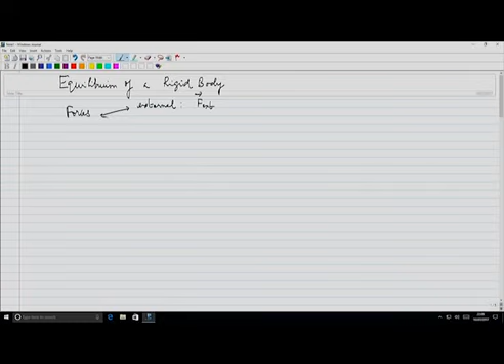Hereafter mostly our focus is going to be on rigid bodies. We had seen that the forces acting on rigid bodies can be divided into two groups: one, external forces, which we generally call force EXT, and internal forces, which we denote as force internal. We had seen that these internal forces usually do not contribute, either for rotation or for translation.

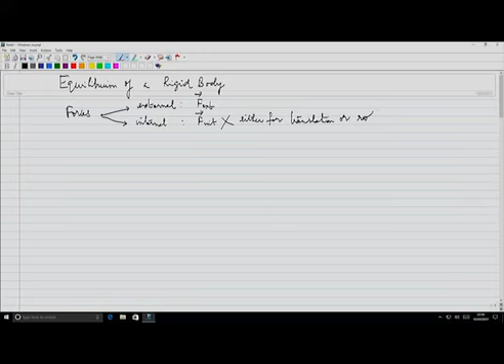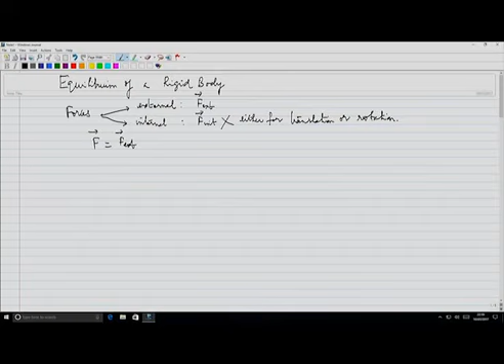So unless otherwise specified, most of the forces we are going to consider are external forces, so we will simply denote it by F vector. Now remember, we have dP by dt, rate of change of momentum, equal to force, and the rate of change of angular momentum is what we call torque, which is responsible for the rotational motion of the object. So whenever a body is subjected to force, there is going to be momentum or acceleration—translational motion is possible—and due to torque you will have rotational motion.

Now we have the concept of under what conditions the system is in mechanical equilibrium. There are different kinds of equilibria a body may be under. There is something else called thermodynamic equilibrium, chemical equilibrium, but right now we are concerned about the concept of mechanical equilibrium. So what is this concept?

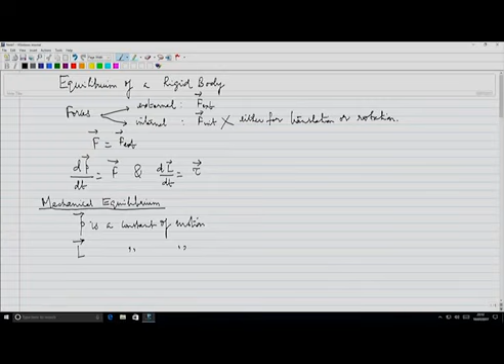This is like this: if linear momentum is a constant of motion, that means linear momentum is conserved, it is not changing. Then in that case what happens? On the other hand, if the angular momentum is a constant of motion, then what can we have? So what happens in this case?

This implies the sum of all the forces acting on the body—there may be several forces, force is a vector, so sigma over i, 1 to n say—this becomes 0. So for mechanical equilibrium, the system of all forces acting on the body must be equal to 0. This is what you call the translational equilibrium.

Then next, if tau is 0—if L is a constant of motion, this implies the various torques acting on the system, depending on how many of them, this is equal to 0. This is what you call rotational equilibrium.

So what is the meaning of the first equation? Remember it's a vector equation, therefore the sum of all the x components of all the forces is equal to 0. So if Fi is the ith force, the x component, and I am summing over all the forces, this is equal to 0. Similarly, all the y components is equal to 0, and all the z components is equal to 0.

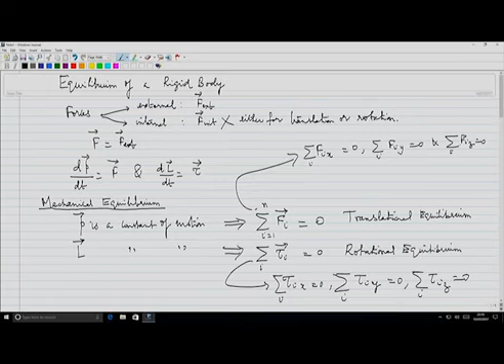Now what this means is that torque is a vector. Again, the sum of all the x components of the torques over all the torques acting is 0, the sum of all the y components of torques is equal to 0, and the sum of all the z components of torques. Here I am writing these two equations in component notation, therefore there is no need to write vectors, we shouldn't write them.

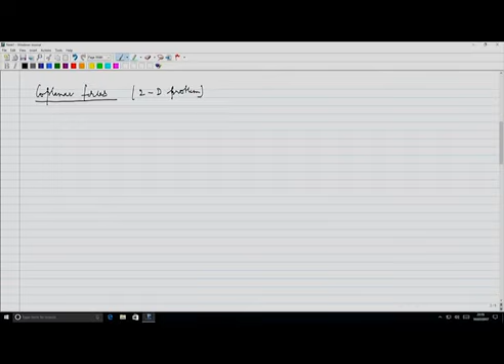Suppose we have coplanar forces—a special situation, coplanar—and let us say the system is under equilibrium. It is essentially like a two-dimensional problem, meaning all the forces are acting on, let us say, the XY plane. Then what happens? For the translational equilibrium, sum of Fi is equal to 0.

This means two conditions: the sum of the x components is equal to 0, and the sum of the y components of the forces is equal to 0. So this is essentially two conditions. And you need to look for a direction perpendicular to this 2D plane—there is no rotational motion about that axis, therefore tau about that axis perpendicular to F1 and F2 vanishes. So essentially it is only three conditions.

Now let us consider an important case. Suppose the sum of all torques acting on this body vanish. Now you may say that I am going to calculate these torques with respect to some other origin. Is it possible that the body will have rotational motion? The answer is no, and we will see why.

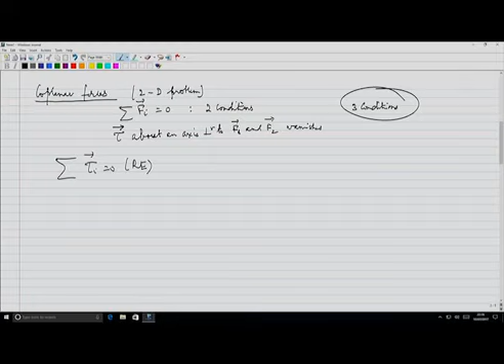I will consider sum of tau I equal to 0. This is for rotational equilibrium, I will call it RE. Is it going to remain valid? Does it remain valid if the origin is changed?

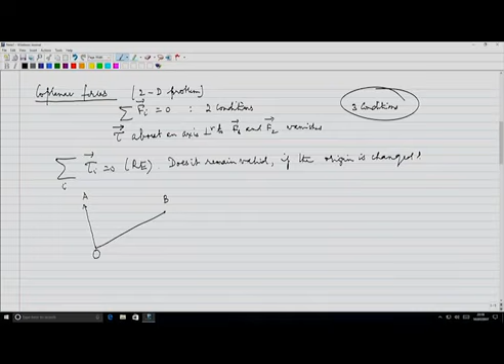You will see that it is a very easy, simple calculation. I have the origin here, and one of the forces acting at A, B, the two points here. Remember, it's a couple acting: minus F, and on this it will be F. These two have to be parallel lines, but in opposite directions. This is B, I will join this.

This is position vector R1. This OA vector has position vector R1. Similarly, OB vector has position vector R2. So these two forces, F and minus F, constitute a couple on a rigid body.

So now let us calculate the moment of the couple. What is the moment of the couple? This is R1 crossed with the force, crossed with minus F, then plus this R2 crossed with F. Actually, the force here is minus F, therefore I should not write it that way, simply write minus F, then F, right?

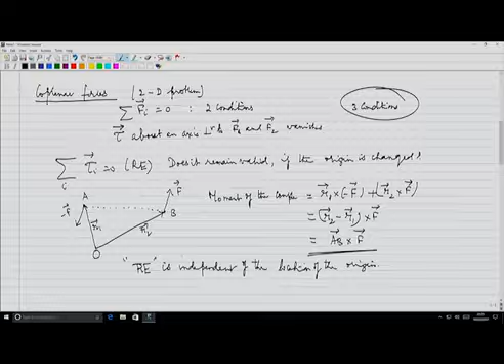So we can say that rotational equilibrium is independent of the location of the origin. And rotational equilibrium, RE, remember what it is, is independent of the location of the origin. So if a body is under rotational equilibrium with respect to a particular coordinate system, and then you change the origin and look at it, it will still remain the same. That is the message.

Now we will consider various cases as possible. The first case is like this - you can treat it as an illustration explaining the basic concepts. I consider a rod AB, with A and B here, and the center here at C. This distance is little a on each side. This is a uniform rod.

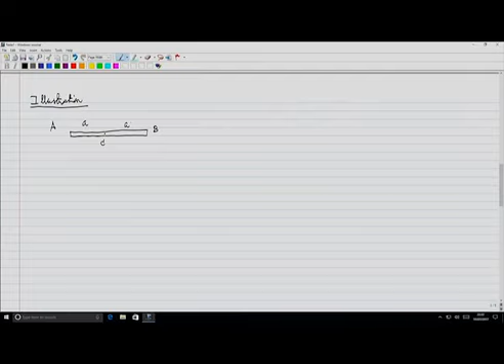Of uniform cross section. Now there is a force F acting, and then there is another F acting here. So this rod is subjected to two forces, F here, F here. This force will induce a torque in this direction, anti-clockwise, and this is clockwise. Both of them cancel, therefore tau is equal to 0.

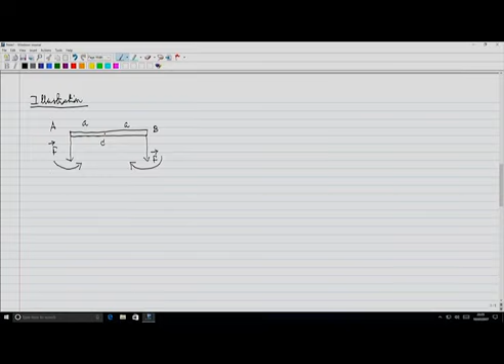But tau equal to 0 means it is under rotational equilibrium. So it is under rotational equilibrium. And what about sigma of forces? Total force is equal to F total, is not equal to 0. In fact, it is equal to 2F.

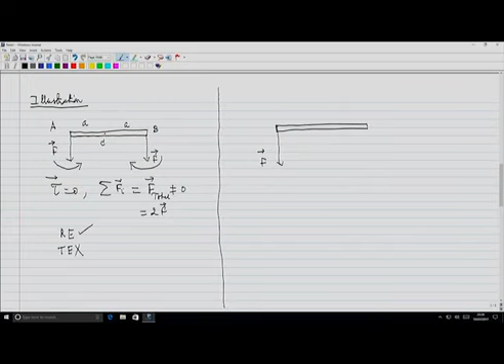So obviously, what will happen? This is a case where - is it under rotational equilibrium? Yes. What about translational equilibrium? No, it is not under translational equilibrium. Now we will consider the other case. We will consider the same rod, and at this end I have a force acting like this, and another force acting like this - it's a couple, strictly speaking, that's the definition. I have the center here. Now, the only thing I changed is I reversed the direction of one of the forces. In this case, what will happen?

Sigma Fi is equal to F total is equal to 0. They are in opposite direction, therefore it vanishes.

However, the sum of torques is equal to torque total. What is the total torque acting on it? With respect to this, it will have a torque in this direction. It is in the anti-clockwise direction, two times the torque due to each force. So this is not equal to 0.

Therefore, what about translational equilibrium of the system? It is under translational equilibrium. Whereas, what about the rotational equilibrium of the system? No, this will rotate. So such a situation, where the body does not have translational motion, where it is under translational equilibrium, however it rotates about a particular point and axis, this is what is called pure rotation.

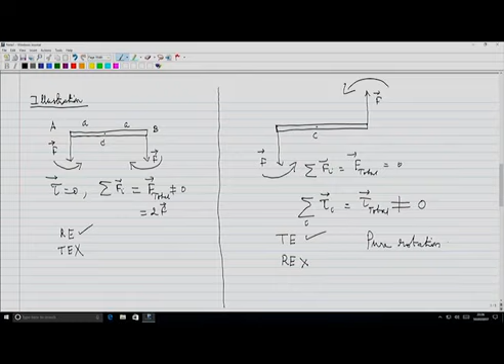We will see one special case. This is what is called a lever problem, a common lever which we use. This is what is called the principle of moments. Actually, this is taught even at an early stage in school. However, we shall discuss this from the point of view of translational equilibrium and rotational equilibrium.

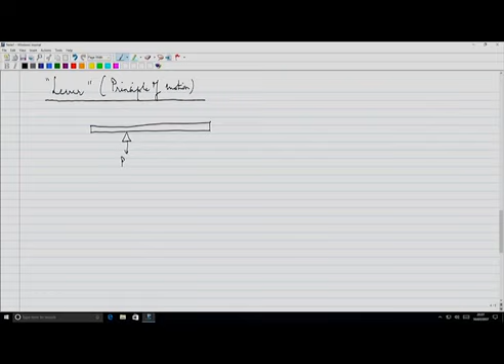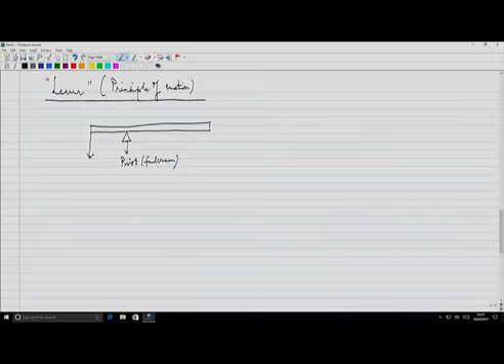So I have a simple lever like this. What you have is a fulcrum, this is what you call a pivot or fulcrum as it is known, and this is subjected to, here there is a force. This distance is d1, and then this distance is d2. Call this point as A, call this point as B.

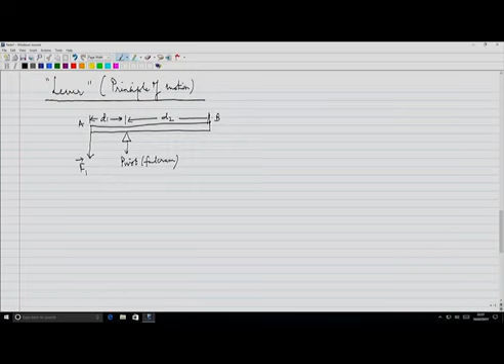Now this pivot point you can call it as O, about this particular point. Now what happens? This whole rod, ideally speaking, a lever should not have any mass, so it's of negligible mass. So an ideal lever has negligible mass.

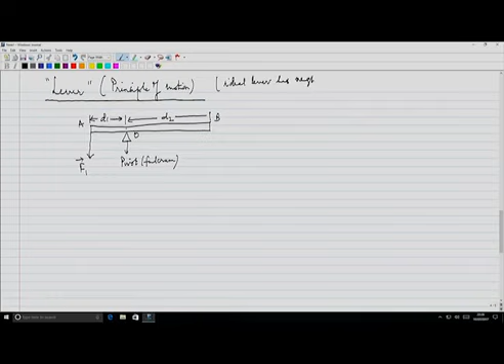So there are two forces, one force is acting here, another force F2. It will have a moment like this, it will induce a moment, this will induce a moment like this. Finally it will be there. So generally, this is the load arm, this section is known as load arm. This A to O is known as load arm, then O to B is known as the effort arm.

There is a weight here which requires to be lifted or moved, and here is effort, some force you are going to apply. Now there are forces acting here, therefore there will be a reaction at this particular point, reaction at the fulcrum. Reaction of the support at the fulcrum, this is a vector quantity.

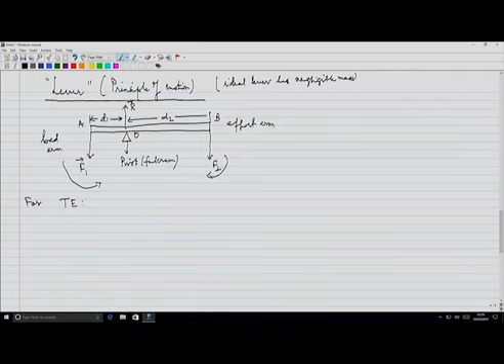So for translational equilibrium, what we need is this R must be equal to F1 plus F2.

Now, taking moments, there are three forces acting essentially: F1, F2 and the reaction, which is also of a force variety. Now taking moments about this particular point O, what do you get? The moment due to F1 is F1 into D1. And because this is rotational equilibrium, you will see that this must be equal to F2 into D2.

So this is for rotational equilibrium, you have this condition; for translational equilibrium, you have this other condition. From this, the object is not rotating at all, it is in equilibrium, neither rotating this way nor that way. Both these moments are cancelling each other. So from this we have F1 by F2 is equal to D2 by D1.

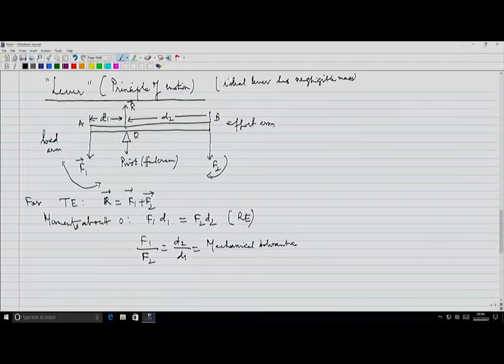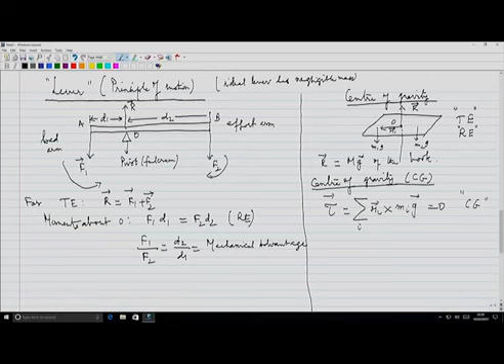So what happens is, the center of gravity of a body is that point where the total gravitational torque on the body is 0. This is the definition of center of gravity. The total gravitational torque acting on the body must be equal to 0, and so Ri and G are perpendicular to each other. Therefore essentially you are left with summation of Mi Ri equal to 0.

At this stage one would think that this is the same as the center of mass, but it is not. Remember, the center of mass definition is this quantity divided by the total mass. However, it will turn out to be the same if the origin is the center of mass of the body. If origin is the center of mass of the body, then it will turn out to be the same. So the center of mass and center of gravity, both of them...

...will turn out to be the same if the body is subjected to a uniform gravitational field. So center of mass equals center of gravity in a uniform gravitational field.

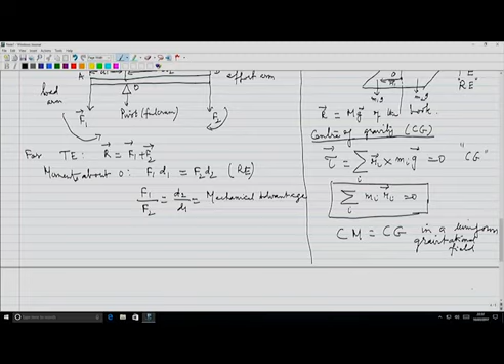Now, on the other hand, if G varies from point to point, then center of mass and center of gravity do not coincide.

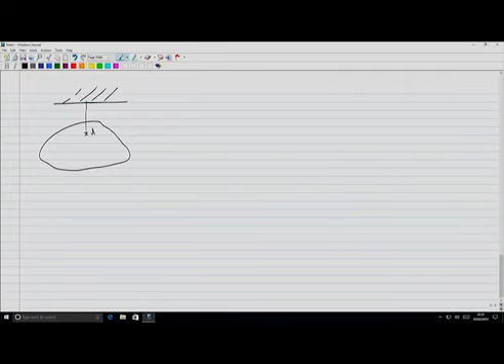Now how is the center of gravity of a body determined? This is again a very standard one. Suppose I have a cardboard or something and I want to find the center of gravity. This is a very standard procedure. What you do is you suspend it from a particular point A. This point is A. So the whole weight is going to act along this direction.

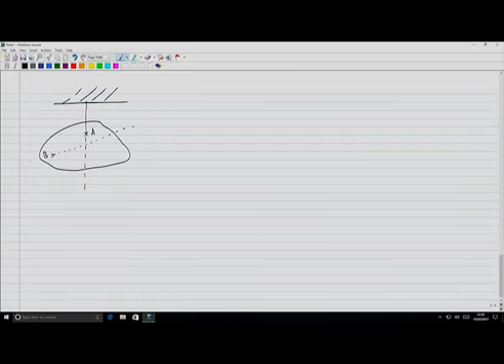Now you take some other point B and suspend it again. Then its weight will act along this, when you fix the whole body about point B. Similarly, you will find that various lines will intersect. Suppose I have another point C here and do this. So this intersection is the center of gravity. So this O is the CG of the body.

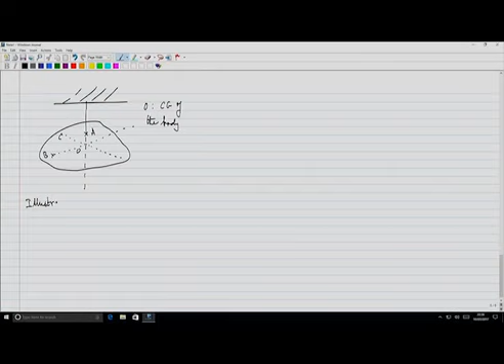We will work out an illustration, a simple problem to illustrate this. You can treat it as an example, with various concepts which are involved. We will put that together - so I have a rod.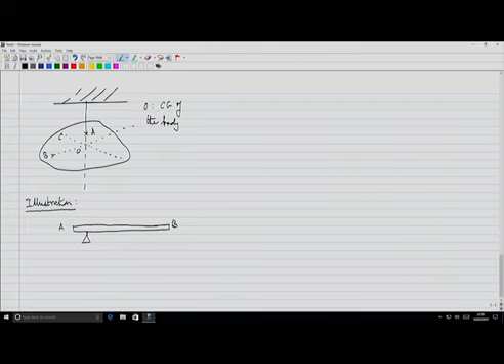This end I will call it as A, this end I will call it as B. There is a pivot here, K1, and there is a pivot here, K2. It's obvious that there will be a reaction here.

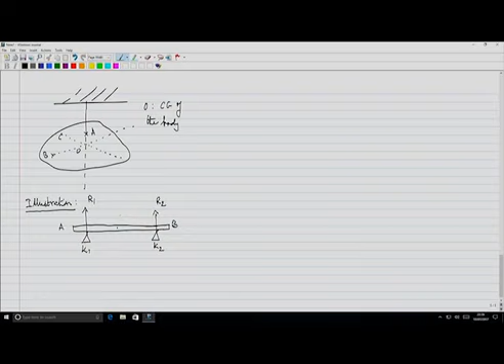The weight will act down. Let us say that this weight is W. Remember, mass times acceleration due to gravity. This is 4.

Then I have another weight at this particular point P. Let us say that this is the point P. There is a weight W1. This W1 is given to be 6 times G.

Now K1 and K2 are pivots or knife edges, whichever way you want to take. There are few dimensions given in the problem, I will specify that. AB is 70 centimeters, namely the length of the rod.

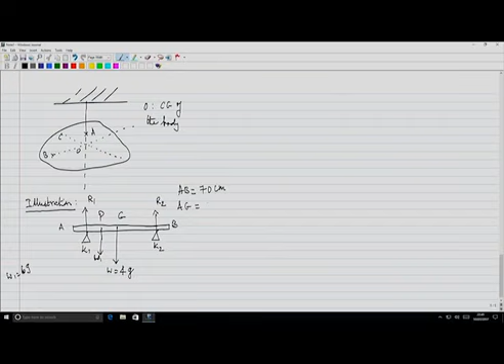Then AG, because this is the center of gravity, is 35 centimeters. And AP is given to be 30 centimeters. So obviously PG would be 5 centimeters.

Okay, then we need certain distances. What is this AK1? AK1 is equal to, and AK1 is equal to BK2. This is the location of knife edges. It's 10 centimeters.

And so we know what is K1G and K2G. K1G is equal to K2G is equal to, so 35 minus 10 is 25 centimeters. Right, now we have

it is under translational equilibrium. Therefore the forces acting upwards, R1 and R2, must be equal to forces acting downwards. So translational equilibrium implies R1 plus R2, the reactions, must be equal to W1 plus W. So we can have this: R1 plus R2 is equal to W1 is 6, W is 4, therefore 10G. Okay, this is one equation.

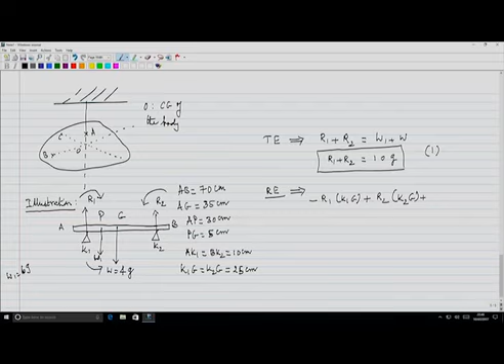So minus R1 into, what is the distance? K1G, plus R2 into K2G. This plus, there is one W1 acting here, W1 into PG. Sum of all the moments is equal to 0.

So we can substitute the numbers. This is 0.25 in meters. K2G is 0.25 meters. PG is just 5 centimeters here, therefore it is 0.05 meters. From this you will get an equation: R1 minus R2 is equal to 1.2 G.

Strictly speaking, I should put, if I want to write the units, I should write newtons here. And some little bit of arithmetic is involved, do it. Now from these two equations, you can calculate R1 and R2.

R1 is equal to, if you add these two equations, 2R1 you will get, from the 2R1 is equal to 11.2, then R1 would be 54.88 newtons and R2 is equal to 43.12 newtons. Right? So it is very easy to do these kind of problems.

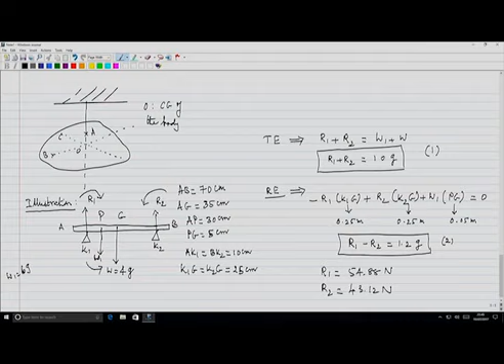All that you need to do for these kind of problems is to write the balancing equations for forces and write the balancing equation for torques, namely translational equilibrium condition and rotational equilibrium condition. When you write down the rotational equilibrium condition, you need to take torques about a suitable point where your algebra would be simpler.

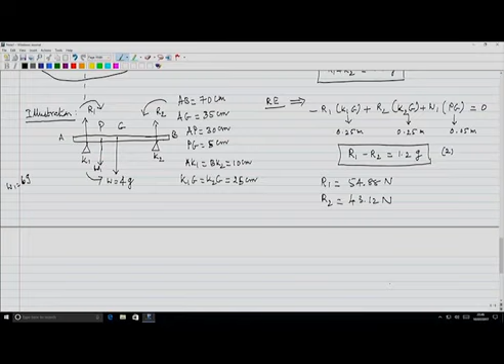And now we will consider an illustration, another problem. But there are different kinds of problems that are involved which are repeatedly asked in examination. Various things can be asked. One is a ladder problem. This I will call it as an illustration or a problem. You can treat it as a problem or example. This is what the ladder problem is.

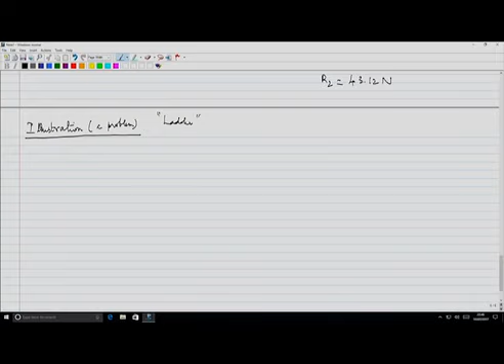Ladder, right now. So the situation is like this. I have a wall. I have a ladder here, this is a ladder, ladder is AB. The wall is smooth, whereas the floor is rough. I can have this also rough, this also smooth.

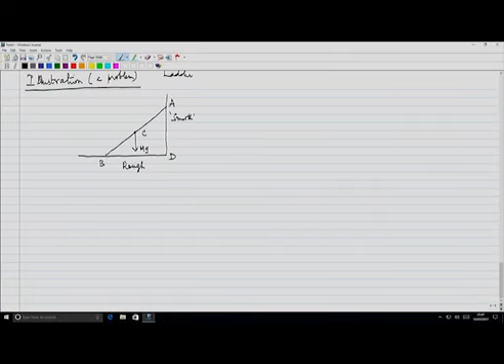We will do this. So this point I will call it as D, this is C. Call this point as C. So the weight will act downwards, M into G. Now, what are the various forces acting? That's what first we should sketch very clearly, indicate very clearly, then indicate the directions of torques also very clearly.

Now, because the wall is smooth, there is going to be a reaction here. I need to have a little longer one for reasons you will realize why. This I will call it as N2.

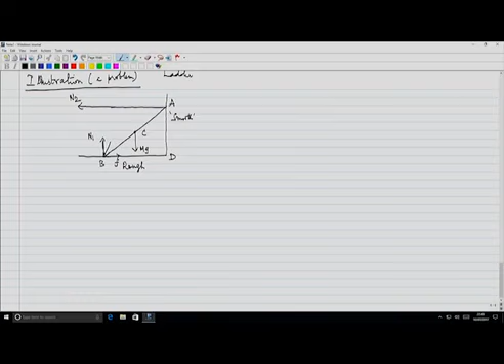Then, because it is rough here, what happens is you have here a frictional force F, and this is what is going to be the normal reaction of the floor on the foot of the ladder. Now these two forces can be combined into one, I mean, I'm not indicating it very clearly.

So, this is going to be the F. This particular one is what is going to be the F. Sorry, I need to do it. This is F.

Now, for equilibrium, when I produce this, when this force is produced, they must meet at a particular point, not a bad diagram, and this point I will call it as O.

Why should they meet there? In that case, what happens? If they don't meet, what will happen? Because if they meet, all the torques about this particular point will be zero. Therefore, it will be under rotational equilibrium, and it's also under, we will see this.

Okay, AB, length of AB is L, right? And we will call this angle as theta. Which angle? The angle made by the ladder with the floor as theta, right?

So what is F, sir? Actually, F is nothing but the reaction of the floor, on the foot of the ladder.

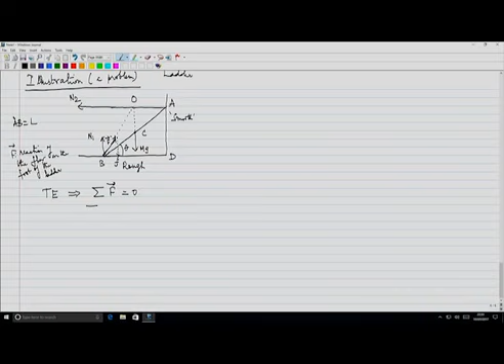What are the forces acting, sir? We can have two kinds of forces, one along horizontal direction, one along vertical direction. Therefore, we will have two equations, sum of all Fy is equal to 0, and F of x is equal to 0 implies there are only two forces along the horizontal direction. N2 is one force, it is acting at A. There is another force, namely the frictional force F, which is acting at B. Therefore, F is equal to N2.

What about the forces acting along Y direction? Only two. One is the weight of the ladder, which is acting at the center of gravity, and the reaction at this particular point. This implies N1 is equal to mg. Two important equations we have got.

All that we have done is to make use of translational equilibrium, nothing more. Now, rotational equilibrium.

So, sum of all the torques, this must be equal to 0. About which point I would like to calculate? And I would like to calculate net torques about B. And so I will say that net torques about the point B. You can choose any point you want.

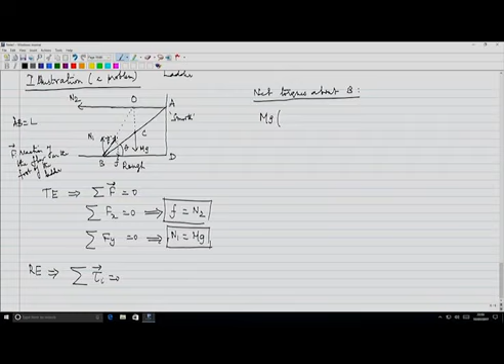So mg into the foot of the perpendicular from this particular point, that will be equal to what? This length will be L by 2. This whole length is L by 2. This is L by 2 into cos theta minus

N2 into, what did I do? I should drop the perpendicular to this. That would be whole thing into sin theta. This length into sin theta. L sin theta is equal to 0. So I will have N2 is equal, I will cancel this.

N2 is equal to, I know it is already equal to F. Here that will be equal to mg into cot theta by 2.

Now I know what is N1, I know what is N2, therefore I can calculate what is the total force. F is same as N2, therefore total force. What is the total force? Actually it is the reaction of the floor on the foot of the ladder.

This will be equal to square root of, as from this particular figure, I have here N1 squared plus F squared. This is same as square root of N1 squared plus N2 squared. This is equal to N1 squared is mg squared, 1 plus cot square theta by 4.

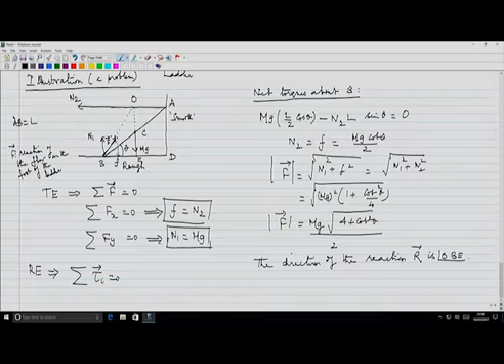This again is one of the typical problems, the ladder problem. Another typical problem is when you keep a heavy block on an inclined plane. This kind of problem is called inclined plane. We will call it block or blocks placed on an inclined plane.

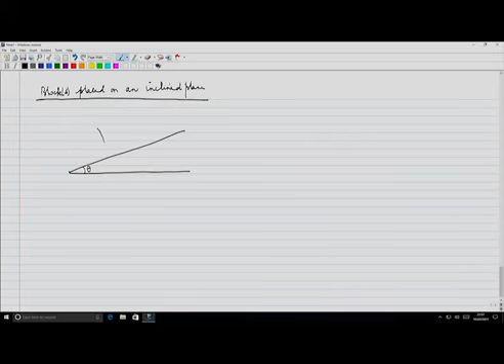This is another typical problem. I'm not going to write down the problem, but I will describe the physics of it. I have an inclined plane, this is theta, and I have a block placed on it. H is the height of the block, and the length of the block or side of the block is B. The weight will act through the center of gravity. This will be mg.

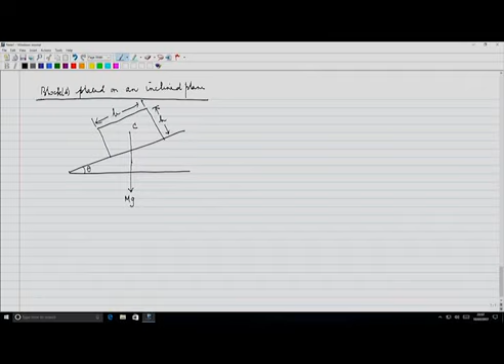This can be reduced a little bit and resolved along two directions. This is mg cos theta, and this will be mg sin theta.

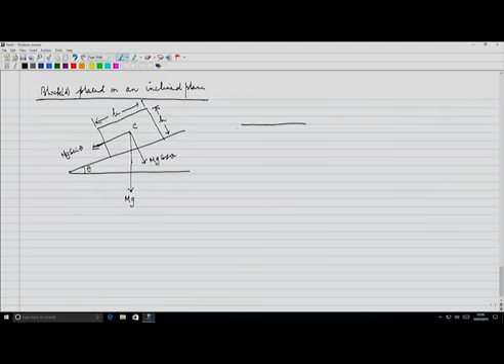Now let us say that this particular inclined plane can rotate about this point. Then this top portion will coincide like this, and the block is placed on it. Now I can rotate the inclined plane, meaning the angle theta can be increased. When the block is on the floor, mg acts downwards, and the normal reaction also acts here.

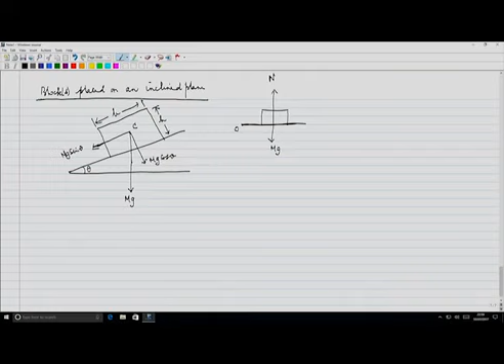Now if I keep rotating, there is a situation when this block can topple. When the block topples, this normal reaction will no longer act through the center of the CG. So the normal reaction will act at some other point. This is the direction of normal. As you keep rotating, when you reach a particular point, this n will move. This distance we will call x.

I will produce it so you will know clearly. This distance I will call x. So the point of application of n will shift from this line towards this, and the body will topple when n exactly coincides with this particular side. Now this kind of problem can be done. This I will call A, and this point I will call B. That's all I would need.

Now I will write down that the block has two tendencies. One, the block can slide down - it is translational motion. So one can write down for translational equilibrium: sigma of F must equal 0.

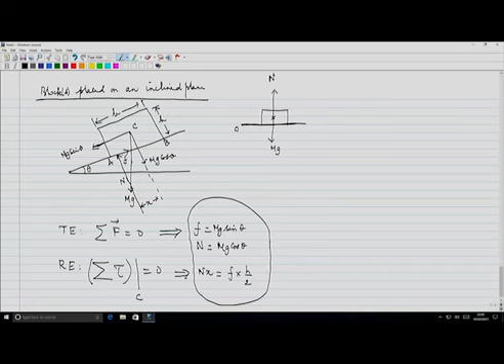So from these three equations we can discuss when the toppling will take place, whether toppling can take place before sliding, or sliding can take place without toppling, etc. Various such situations we will discuss in the problem session. Thank you.